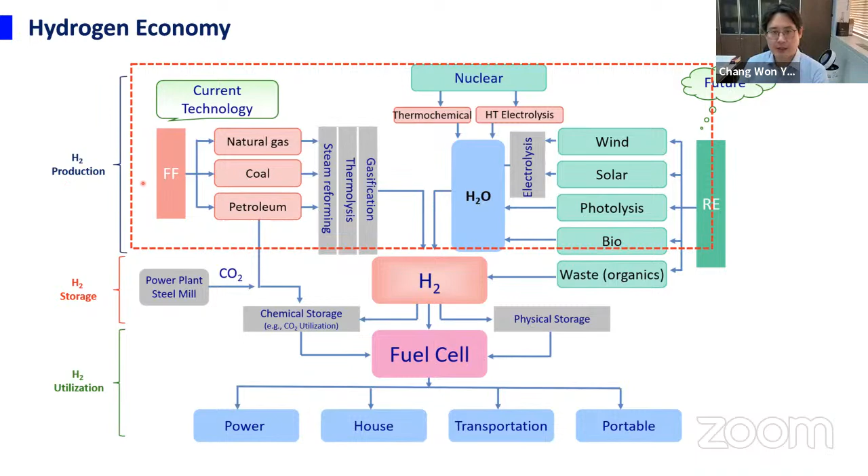So today, especially, I will introduce you to hydrogen production technology. The question is how we can produce hydrogen. I will introduce three parts: the first part is fossil fuel reforming, the second part is chemical dehydrogenation, and the third part is future technology and water electrolysis.

Let me first start with the current hydrogen production technology. There are some fossil fuel reforming processes here. The first process is steam reforming (SR), and partial oxidation, called POX. The third one is autothermal reforming of fossil fuel, and the fourth is dry reforming and others.

What are the advantages of this fossil fuel reforming process? First, it is economical. This is because previously many companies and industrial partners invested significant money to construct this kind of plant for hydrogen production utilizing fossil fuel. This is why it is economical right now—we can use the existing infrastructure.

But the disadvantages include that the fossil fuel reforming process releases significant quantities of CO2, so it is absolutely needed to capture the CO2 and sequestrate it somewhere. That's the problem.

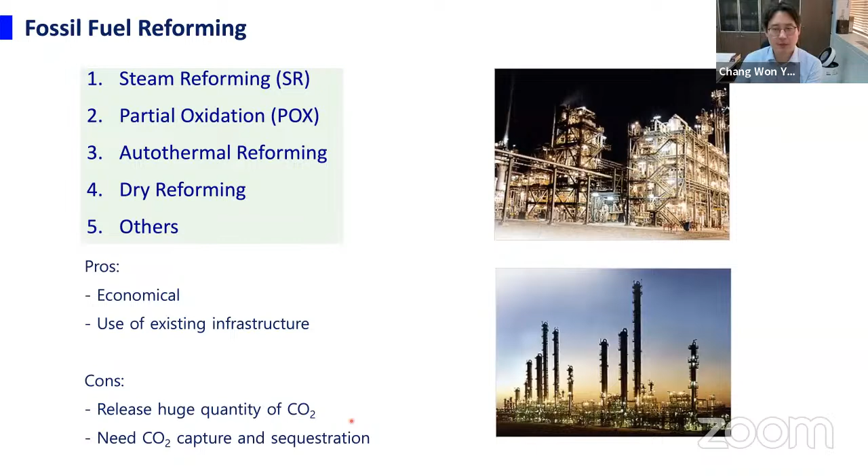Let me talk about fossil fuel hydrogen production technologies. This is the major hydrogen production technology nowadays, so we definitely need to know how it goes.

Let me start with the steam methane reforming process. You can use methane, the major constituent of natural gas. I'm not talking about steam reforming of fossil fuel in general, but steam reforming of methane specifically. This is called SMR.

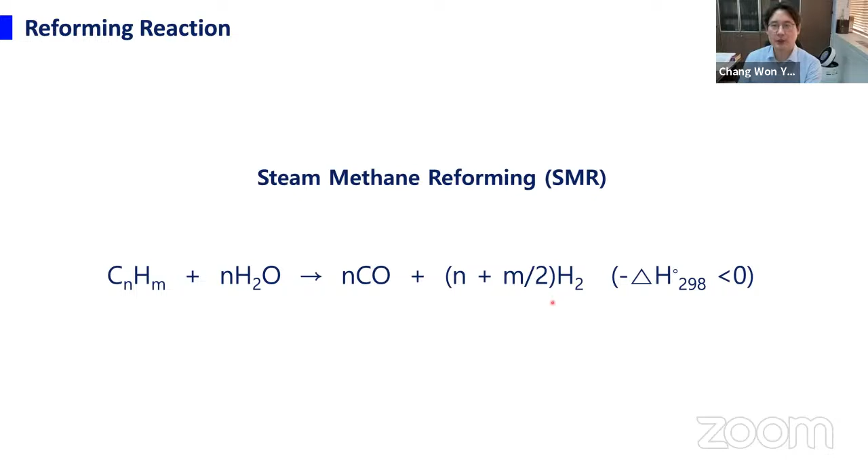Generally, if we use fossil fuel, the steam reforming process means we add steam, and in the presence of a catalyst, we crack the C-H and C-C bonds to produce CO and H2. That's the basic stoichiometric reaction of fossil fuel steam reforming.

Let me use methane for the steam reforming process. The methane reacts with steam to produce CO plus hydrogen. That reaction is endothermic, with a reaction enthalpy of 206 kilojoules per mole.

The product gas is a mixed gas of CO and hydrogen. This is called synthetic gas, syngas, and the hydrogen to CO ratio will be 3.

Now we're talking about hydrogen production technology. If we use this produced hydrogen in conjunction with, for example, the polymer electrolyte membrane fuel cell (PEMFC), we can't actually use this syngas directly to power the PEMFC, because the CO can poison the platinum catalyst in the fuel cell. So we definitely need to remove this CO.

So what we can do is a CO removal technology. One of them is called the water gas shift reaction, WGS. What it does is CO reacts with additional steam to shift to CO2 and H2 products. You can imagine the oxygen is transferred into CO to produce CO2.

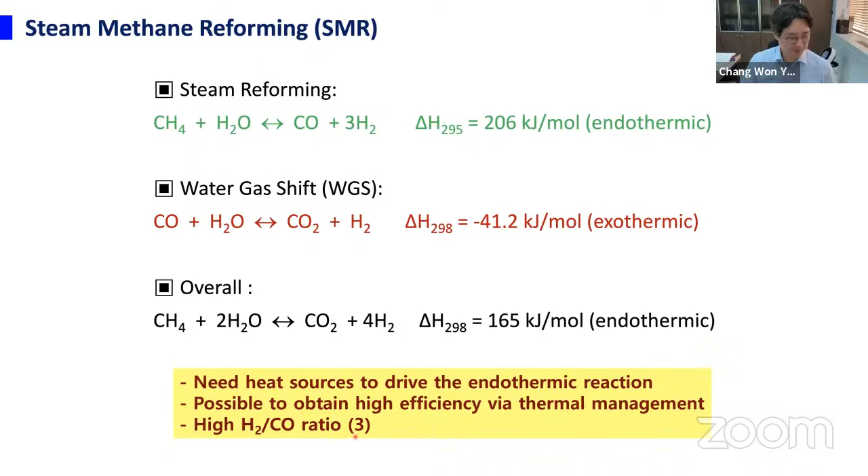That's the reactor for the steam methane reforming reaction. The steam reforming reactor shown here has catalysts equipped inside, with a radiation burner and heat transfer. If you look at the feed, it's about 25% methane with 75% steam, and it produces hydrogen, CO, CO2, unreacted methane, and some steam.

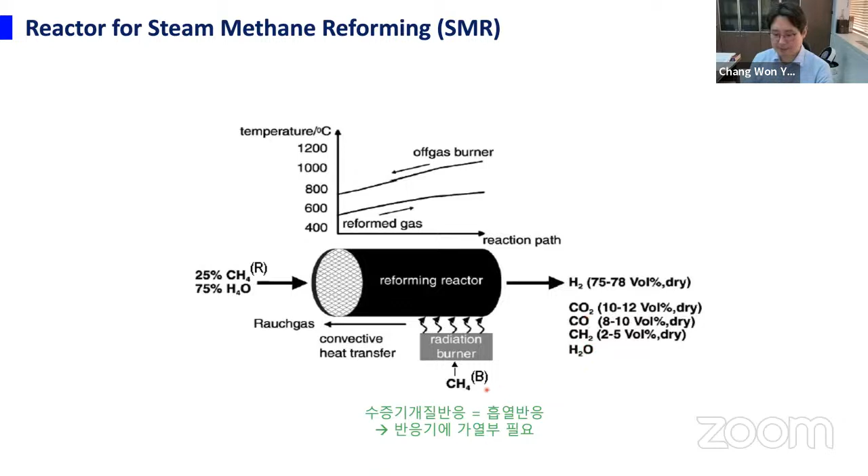I will skip this. So this is the real case, looking at the reactor for steam methane reforming, the SMR reaction. This is the cracking reactor, where natural gas and steam go in.

The reaction conditions shown here are about 20 to 30 atmospheres, a high pressure, pressurized reactor, and the temperature is about 800 to 900 degrees Celsius. It's a very high pressure and very high temperature reaction.

The reaction happens to produce a mixture of CO and H2. And I said we need to remove the CO, so here is the water gas shift reaction. The shift reactor means the water gas shift reaction, WGS reaction.

As you can see, there are two processes for WGS. The first is the high temperature water gas shift reaction, used to decrease the CO concentration to some lower level. Then we apply the second process, called the low temperature water gas shift reaction, to further decrease the CO level.

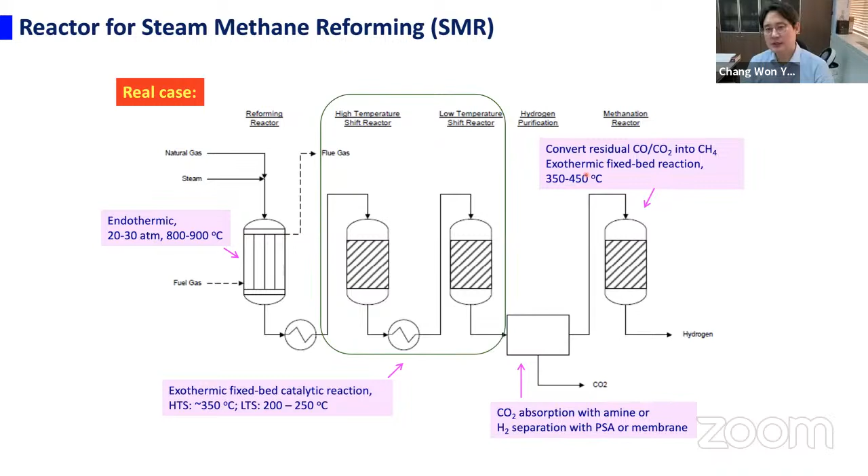The HTS means high temperature shift reaction, which occurs at 350 degrees Celsius, and the low temperature shift reactor occurs at 200 to 250 degrees Celsius. The rest will hopefully be H2, mostly H2 and CO2, with unreacted CO remaining. The CO2 will be removed by pressure swing adsorption technology or hydrogen separation membrane, and the remaining CO will be further removed by other technology. Ultimately, we can get high purity hydrogen.

The second hydrogen production technology using methane is POX. If you look at the complete oxidation of methane, 1 mole of methane reacts with 2 moles of oxygen to produce CO2 and steam water. That is an exothermic reaction - a very large exothermic heat will be produced, so we can use it. This is what an internal combustion engine does actually.

POX is partial oxidation. For complete oxidation, we need 2 moles of oxygen, but for POX, we only apply 0.5 moles of oxygen. Then we can produce syngas. The syngas ratio, the H2 and CO ratio, is 2:1. Then what we need to do is remove CO, using water gas shift reactions.

The total reaction enthalpy is exothermic, so in many cases we do not need heat sources - it's just burned. But the total heat in and out is low, so relatively low efficiency. But we can proceed with a very easy startup.

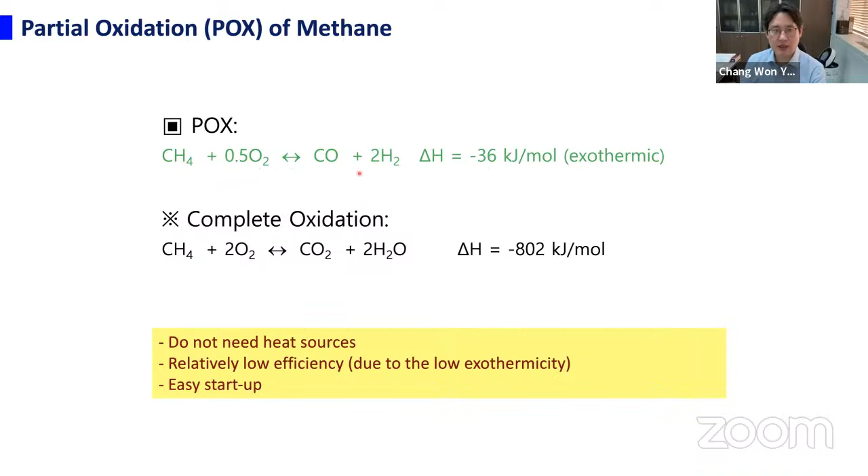The concept here is that initially, if you add all these mixtures, all this feed, what happens first is the POX will occur because it's easy - a very easy reaction, easy startup. It's an exothermic reaction, so it immediately reacts to produce syngas with heat. The concept is to initiate the POX, then the produced heat will be utilized for triggering the steam reforming process. So this process is relatively easy to start up and has high efficiency.

If you look at the autothermal reforming process, this is the reactor, and the feed consists of methane, oxygen, and steam. If you look at the temperature profile, first when this feed goes in, that's the reaction path. The initial process going on is the POX will occur, and the POX produces heat.

If you look at the temperature profile here, at the first path of the reforming reactor the temperature will rise up, up to about 1000 degrees Celsius. Then the next reaction will be the steam reforming process, which needs to absorb heat because it's an endothermic reaction. The produced heat will be absorbed by the steam reforming process, and at a certain point the temperature will stabilize and be maintained. This is why it's called the autothermal reforming process.

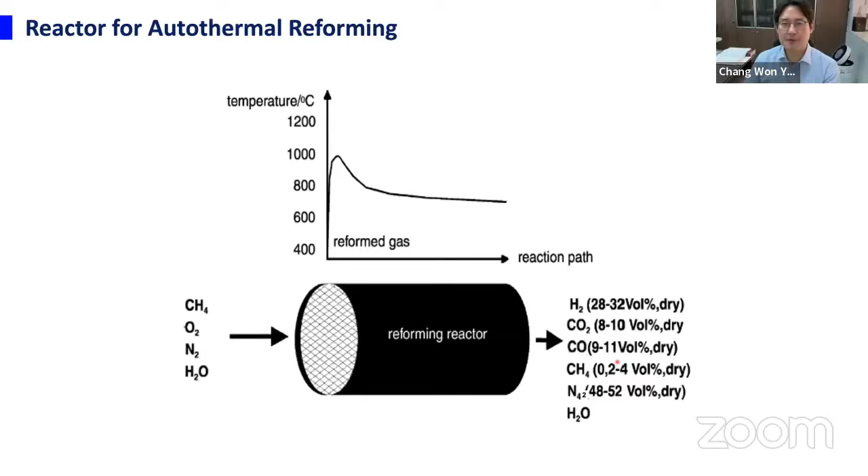The rest of the feed here, the off gas, includes hydrogen at about 30 volume percent, CO2 at 10 percent, CO, unreacted methane, and steam. After passing through this reactor, this mixed gas needs to be purified to obtain high purity hydrogen.

Looking at startup, steam reforming is slow - it's a big reactor, and the temperature is about 800 to 900, so it takes time to increase the reaction temperature. POX is fast, and autothermal reforming is in the middle. For reactor size, steam reforming is big, POX is small, and autothermal reforming is in between.

For hydrogen concentration after the reaction, the steam reforming process gives an H2 to CO ratio of 3, while POX is lower, about 2. The autothermal reforming gives a ratio of 2.5.

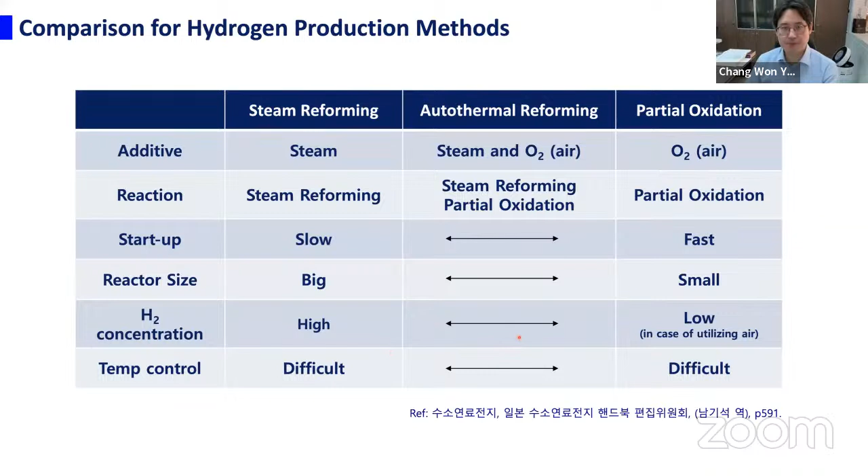If you add more oxygen, you move into the POX region, but the y-axis is 0 there, meaning no steam is added in that region. That's the POX region, with the added oxygen range between about 0.2 and 0.6. The ATR process is in between here.

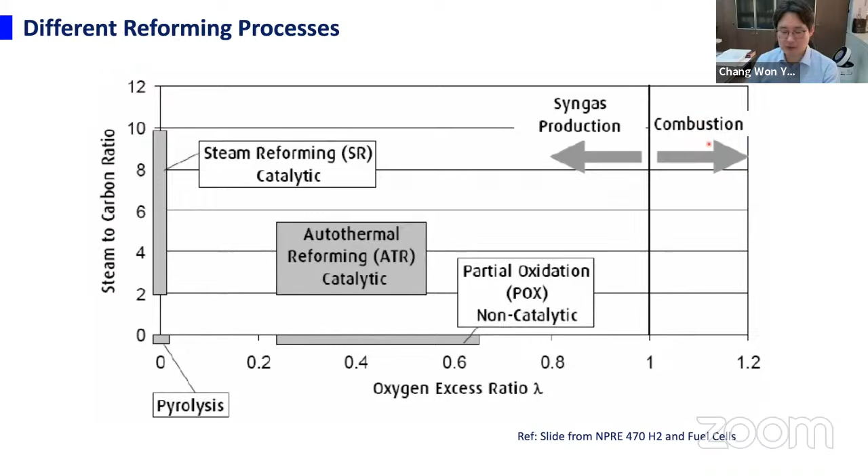If you add excess oxygen, the process no longer produces syngas—the reaction instead goes into the combustion range. This produced hydrogen is then supplied to fuel cells.

Let me briefly introduce some fuel cell technology. There are many types of fuel cells. The first is the PEMFC, which stands for polymer electrolyte membrane fuel cell. Another is the PAFC, which stands for phosphoric acid fuel cell. And the MCFC stands for molten carbonate fuel cell.

Looking at the PEMFC: all fuel cells consist of a membrane electrolyte in between and two electrodes—one is the anode, and another is the cathode. The fuel goes in, and in the PEMFC case, the fuel is H2. First, this H2 is decomposed into 2H+ plus 2 electrons.

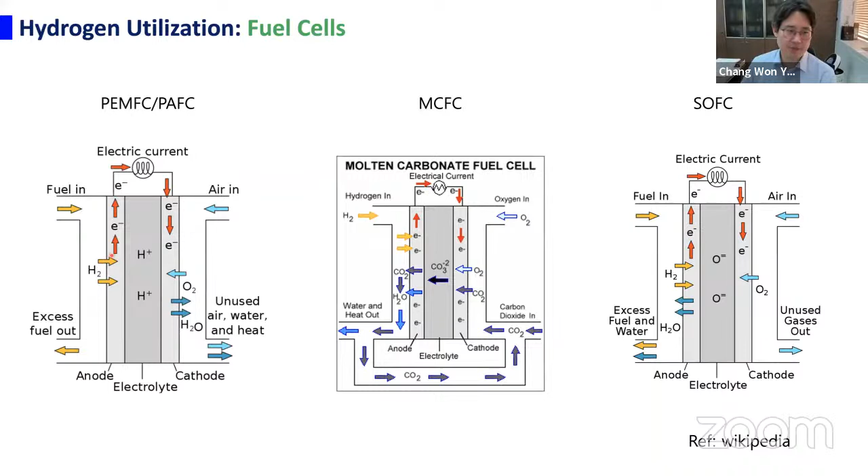Now let me talk about CO. CO can't really be an appropriate fuel for PEMFC because the electrode material there is platinum, located at the anode. If CO goes in, it strongly binds with the platinum and deactivates the whole process. So CO must be removed for PEMFC — this is CO as a poison, not fuel. Over 10 ppm poisons PEMFC. Nowadays we say less than 1 ppm of carbon monoxide must be supplied into PEMFC.

But interestingly, for these high temperature fuel cells — over 700 degrees Celsius for SOFC, 650 degrees Celsius for MCFC — CO is actually a fuel. This is different because the reaction temperatures are very high. Even though nickel catalyst is generally used for the electrode, and CO can also bind to nickel, because of this high reaction temperature the bound CO can be relatively easily taken off from the nickel site. So because of this, CO can be a fuel for these high temperature cells.

And how about sulfur? We talk about sulfur because natural gas contains a lot of it, so we need to know its effect on fuel cell operation. In the case of PEMFC, there are no significant studies on the effect of sulfur, so we don't know exactly. But in MCFC and SOFC, the high temperature fuel cells, sulfur cannot be used because again the electrode material is nickel. If sulfur is supplied into these high temperature fuel cells, it reacts with nickel to produce nickel sulfide species, deactivating the whole process.

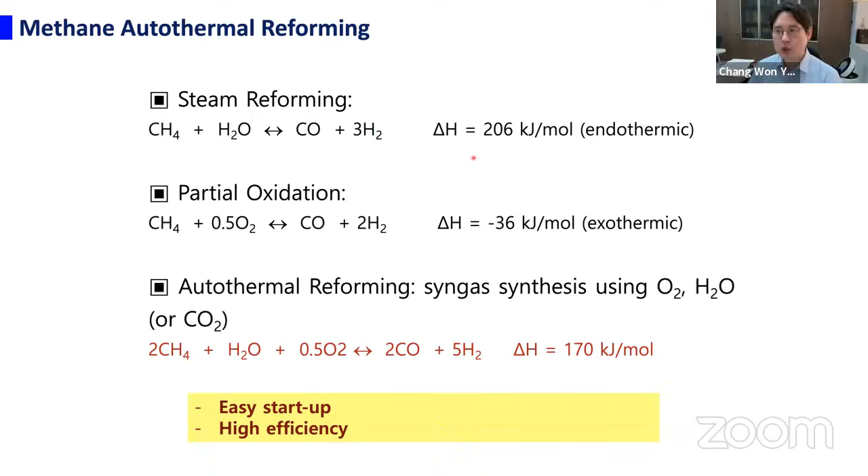Then you can imagine, for example, in the steam reforming process of methane, syngas is produced, and you can directly supply this mixed gas into high temperature fuel cells. There's no problem there because hydrogen is fuel and CO is fuel. But it cannot be supplied into PEMFC because CO can poison the PEMFC. So that's the difference.

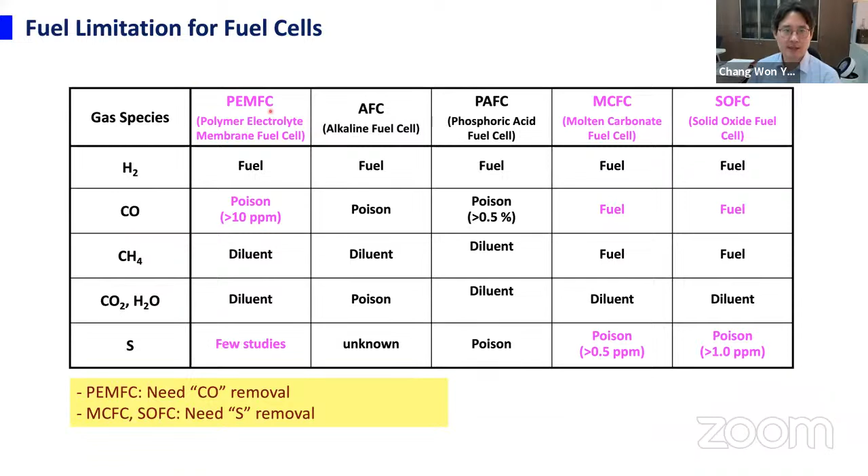So what is the technology for CO removal when utilizing PEMFC? The first one is the water gas shift reaction, which I already discussed. Another CO removal technology is PROX, preferential CO oxidation. There's also methanation reaction, and membrane separation, usually using a palladium membrane to purify hydrogen. And the other option is pressure swing adsorption, called PSA, a commercialized technology.

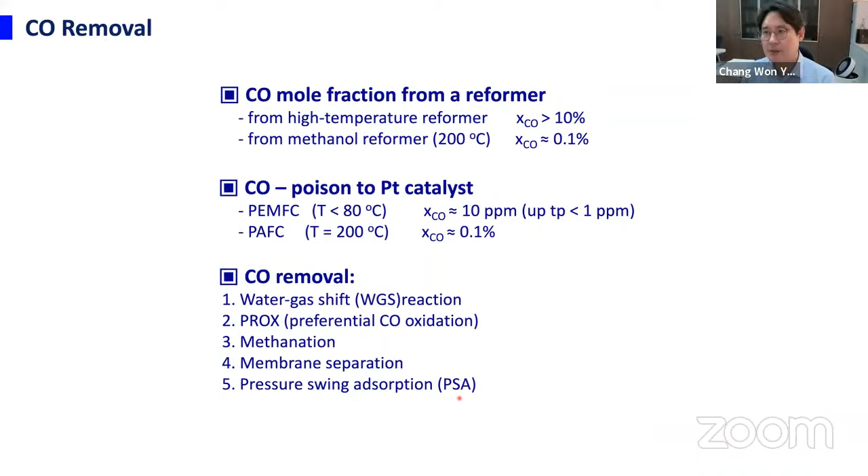What's the sulfur species removal technology? This is called hydrodesulfurization, HDS. For fossil fuel, we need to remove organic sulfur species to less than 0.1 ppm. The first step is hydrogenolysis, which means adding hydrogen, and lysis means cleave. So we add hydrogen to cleave.

In this process, the organic sulfur species, for example diethyl sulfide, reacts with hydrogen to produce ethane and H2S. The catalyst involved is nickel molybdenum oxide supported on alumina, generally called NiMo catalyst, or cobalt molybdenum oxide supported on alumina, called CoMo. The reaction temperature is 300 to 400 degrees Celsius.

The second step: the H2S produced further reacts with zinc oxide. Zinc likes sulfur more than oxygen, so an exchange reaction happens, producing H2O and zinc sulfide. That's how it actually works.

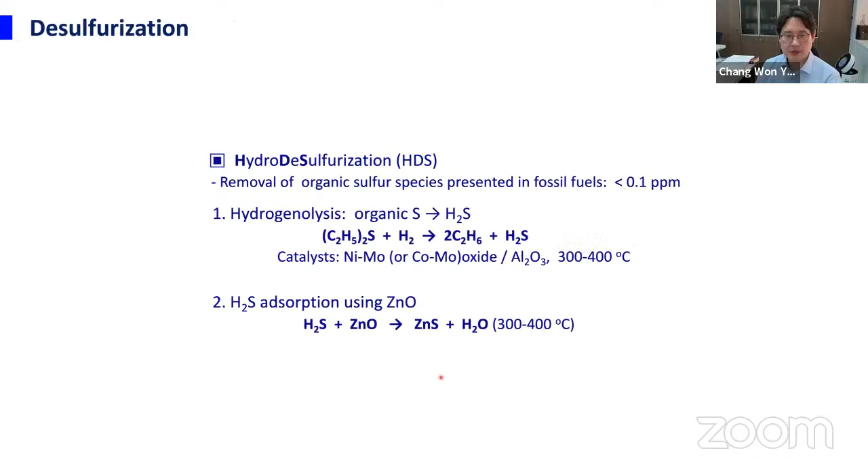If gasoline is the fuel for a PEM fuel cell, we add steam and air to proceed with autothermal reforming, which occurs at 800 degrees Celsius. Zinc oxide is used here because we want to remove sulfur species, so we proceed with ATR reactions and remove sulfur.

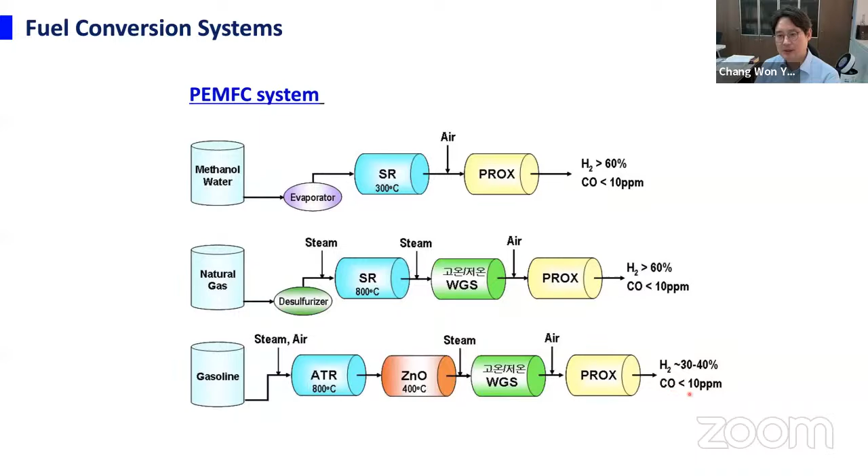The gases at this stage are a mixture of CO and H2. Then the WGS reaction occurs to further remove CO, finally reducing the CO level to less than 10 ppm to produce hydrogen. That's how it works, and this is the real system - I'm going to skip the details.

In the case of an SOFC system, solid oxide fuel cell system, the hydrogen processor will be much simplified. For example, fuel goes in, undergoes catalytic reforming or cracking, and the reformed gas is directly supplied to the solid oxide fuel cell to produce power. That's much simpler.

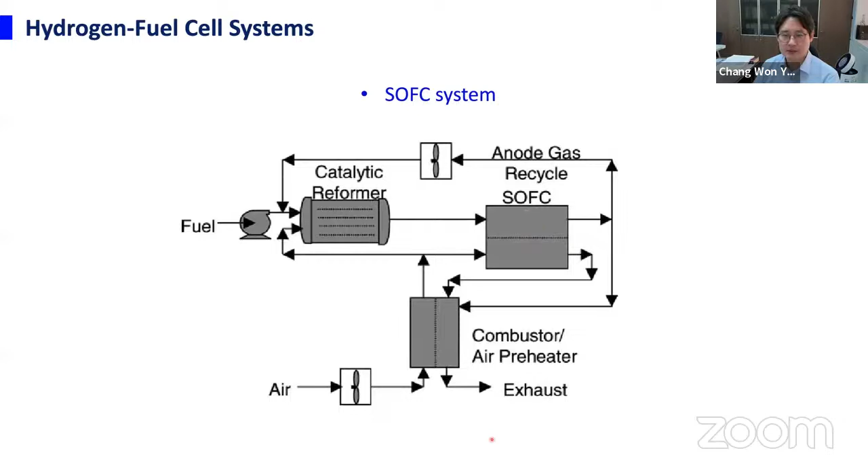Here's an example of a methanol reformer, actually applied for submarines. This is a proven technology from a German company, HDW submarines. They use methanol as a fuel to power PEMFC.

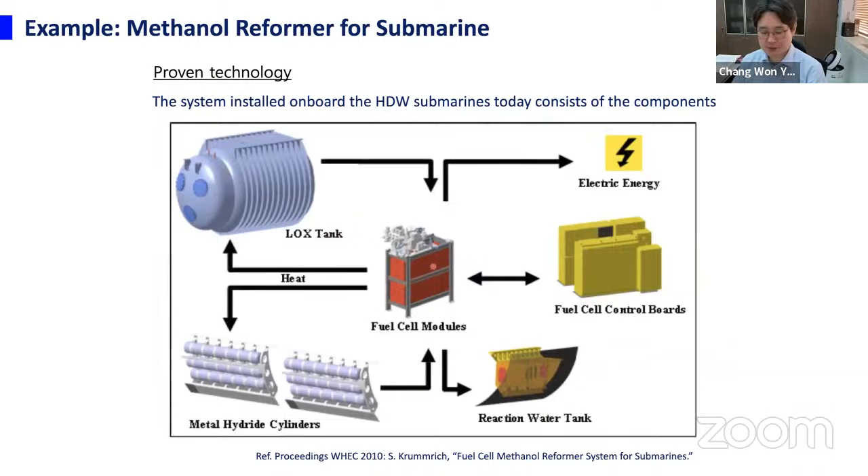Generally, the proven technology uses metal hydride as hydrogen storage. I'm not going to cover hydrogen storage today, but here's a metal hydride example: hydrogen is stored using metal hydride, and when we need hydrogen, we add heat to release it to supply the fuel cell for electricity. That's how it works currently, but now we are developing a methanol reformer system for submarines instead.

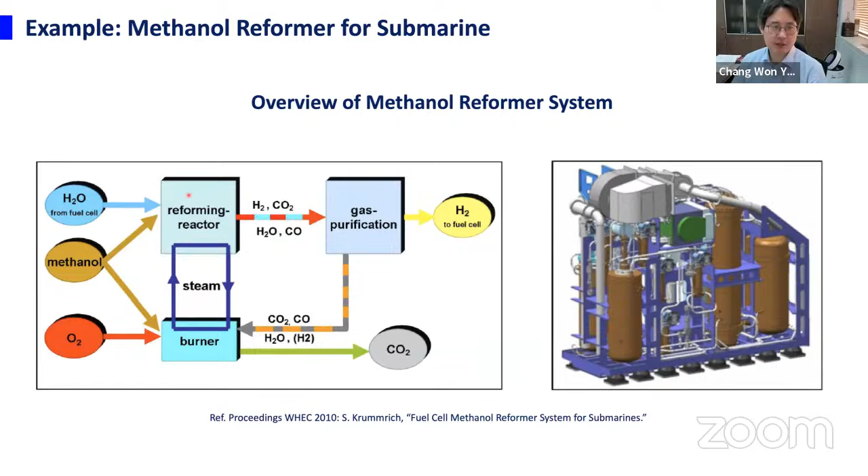This is the methanol reformer. In the reforming reaction, methanol and steam go in, and after reforming, gas purification via WGS or another reactor occurs. The produced hydrogen is supplied to the fuel cell, and the remaining gas provides fuel to supply sufficient heat for the reforming reactor.

The next process for hydrogen production is dry reforming of methane. I already talked about steam reforming, where steam is used as the oxidant. In dry reforming, we use CO2 instead to produce syngas - the methane reacts with CO2 rather than steam. Looking at the reaction energy, this process is even more endothermic compared to steam reforming.

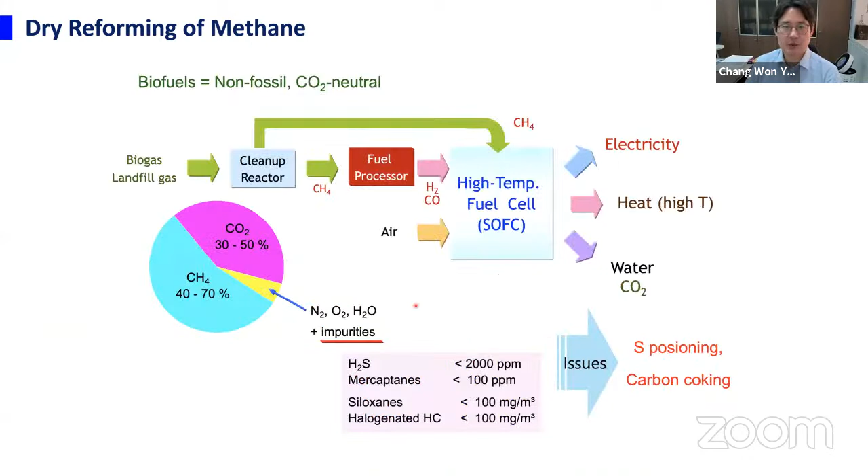And we can also use SMR or the dry reforming process, because the cooling effect will even be higher. So that's how it goes. I'm not going to talk about this in detail. That's how we can produce this, using these types of dry reforming processes.

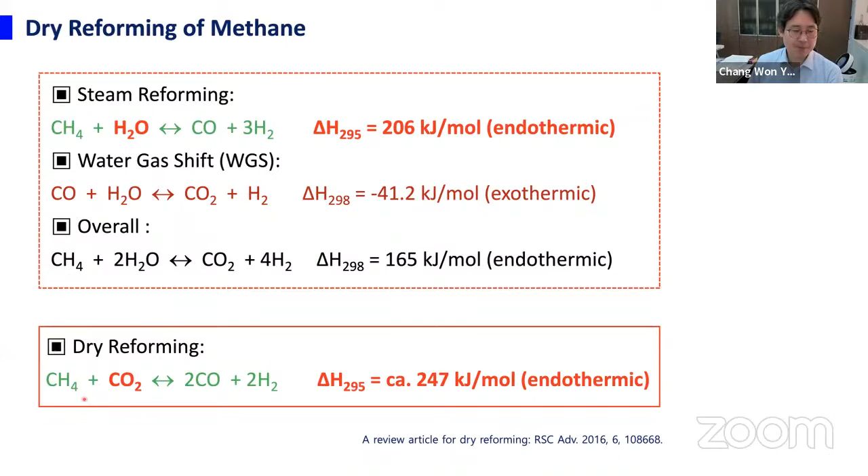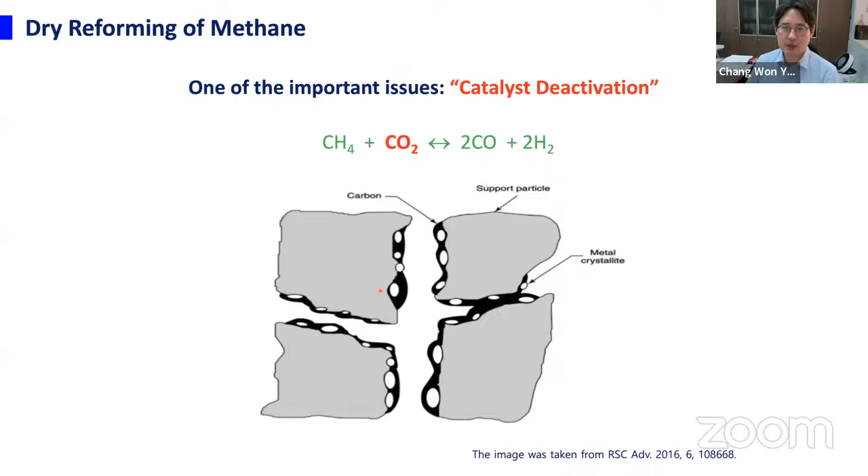But another issue still exists. One of the issues is, compared with steam reforming, in the case of dry reforming, the reactant contains more carbon. So one issue that can happen is catalyst deactivation, because as the dry reforming reaction goes on, these carbons, upon breaking the CH, CC, and CO bonds, deposit at the surface of the electrode catalyst and deactivate it. That's the problem.

Another problem is this deposited carbon produces a sort of carbon filament, because the nickel catalyst can make it—actually this is a catalyst for producing carbon nanotubes or things like that. So this kind of carbon filament is produced, and then that carbon filament will break down the nickel electrode. That's the problem, so rapid deactivation of the cell happens.

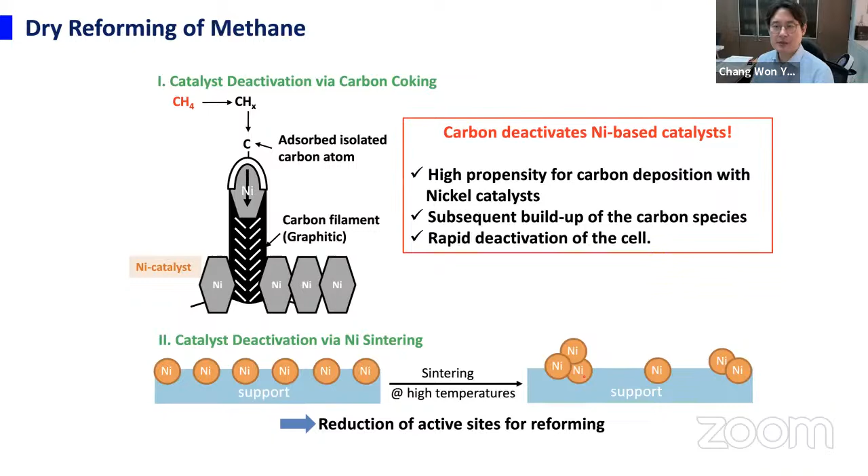And another problem is nickel sintering, which means nickel aggregation at high temperature. Initially, before the reaction, the nickel species is well dispersed on the support. But after the reaction proceeds at high temperatures, surface diffusion of the nickel happens, and nickel aggregates to form a deactivated species. So we need to develop relevant technologies to prevent this kind of catalyst deactivation.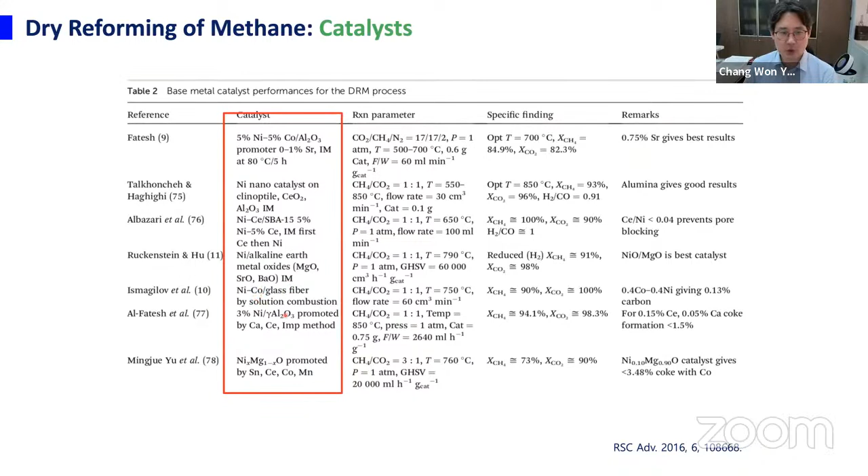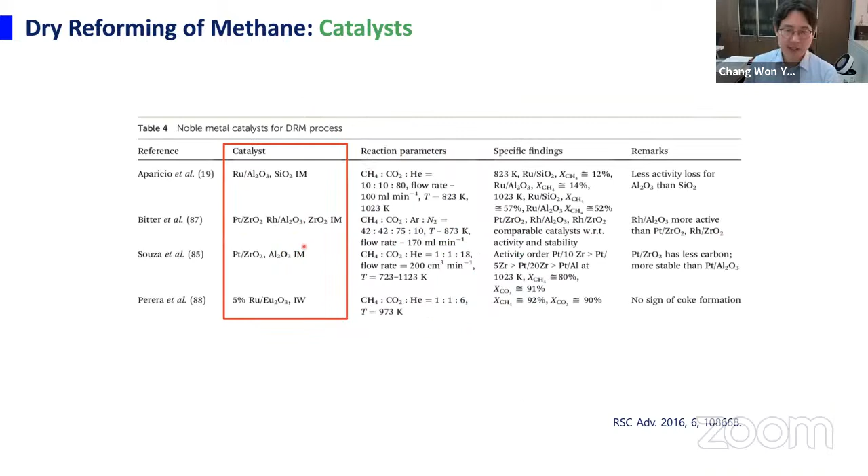So a lot of catalysts have been developed in this regard. Here is nickel with some cobalt as a co-catalyst supported on alumina, and also some ruthenium and platinum. So precious metal catalysts can also be used for these. I'm not going to use this one—let me just briefly say this dry reforming of methane catalyst development is very important.

Another important parameter to optimize the dry reforming of methane reaction is the operating condition. So we supply a mixture of methane, steam, and oxygen, and depending on the ratio of the added methane, water, and oxygen, some regions will derive carbon formation. So we can use the composition of methane, steam, and oxygen within a certain range, and the carbon-free region is good.

Generally, if you want to go from the carbon formation region to the carbon-free region, you can use more oxygen species—for example, more oxygen or more steam. Then you can prevent carbon formation because the formed carbon can react with O2 and steam to produce CO and CO2, removing it from the surface. But in this region, the problem is if you use more steam and more oxygen, especially more steam, you require more input energy. So that's not really the optimal region. Here is the optimal region, some sort of composition range. So this is why operating conditions are very important.

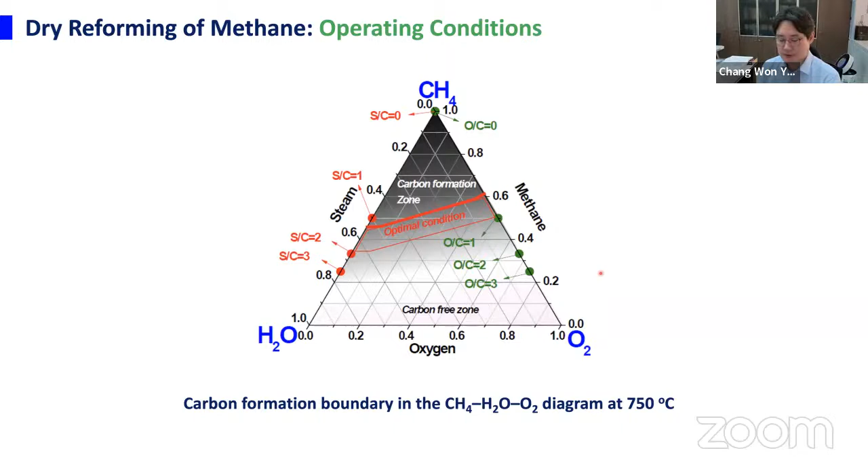Up to here, I discussed some other current technologies for hydrogen production, particularly based on fossil fuel. In summary, fossil fuel hydrogen production technologies are very useful to produce mass quantities of hydrogen, and the produced hydrogen can be used in conjunction with fuel cells and/or hydrogen turbines to produce electricity.

For fossil fuel, for example, the natural gas-based hydrogen production technologies I talked about: the steam methane reforming process, called SMR, then the POX, partial oxidation of methane, the third one is autothermal reforming of methane, and the fourth one is dry reforming of methane.

All these different technologies can produce hydrogen, especially first producing syngas. Syngas contains H2 and CO, but if we want to use these gases for fuel cells, especially pure ones, then we need to remove sulfur or the CO, carbon monoxide.

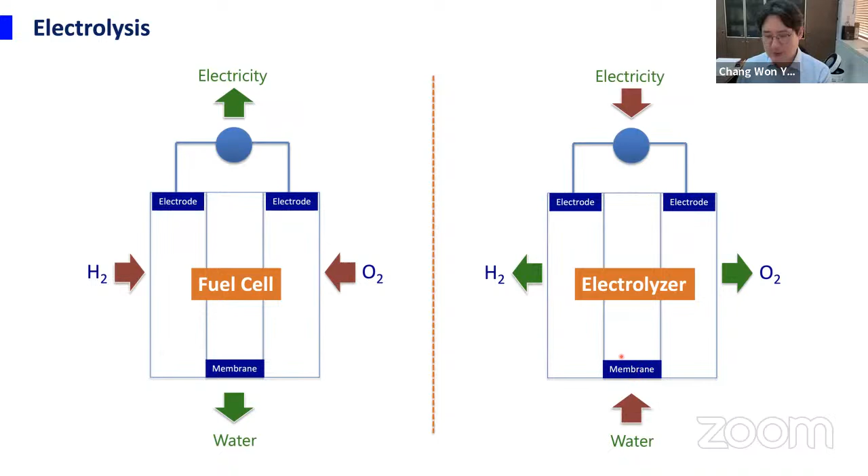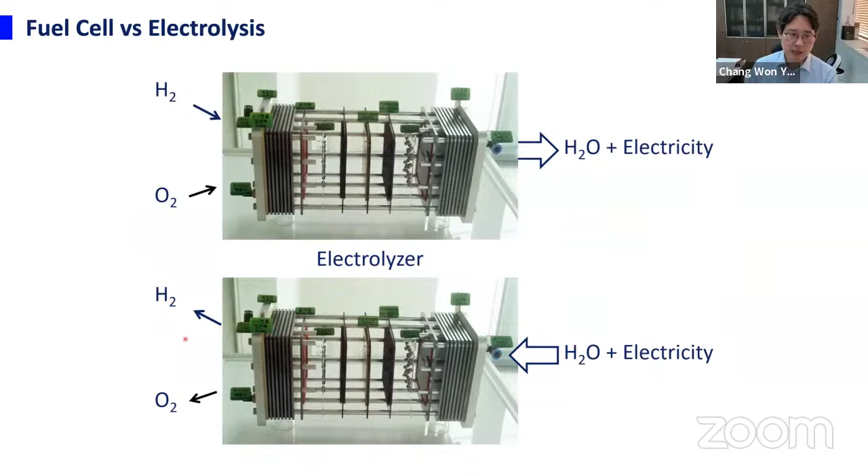Okay, so that's the fuel cell. That's the electrolyzer. Actually, the fuel cell and electrolyzer are the same, but here's the difference. This is the fuel cell: hydrogen goes in, oxygen goes in, an electrochemical reaction happens to produce water and electricity. The reverse reaction turns that into an electrolyzer, so we give electricity and provide water here, and one side produces hydrogen, the other side produces oxygen.

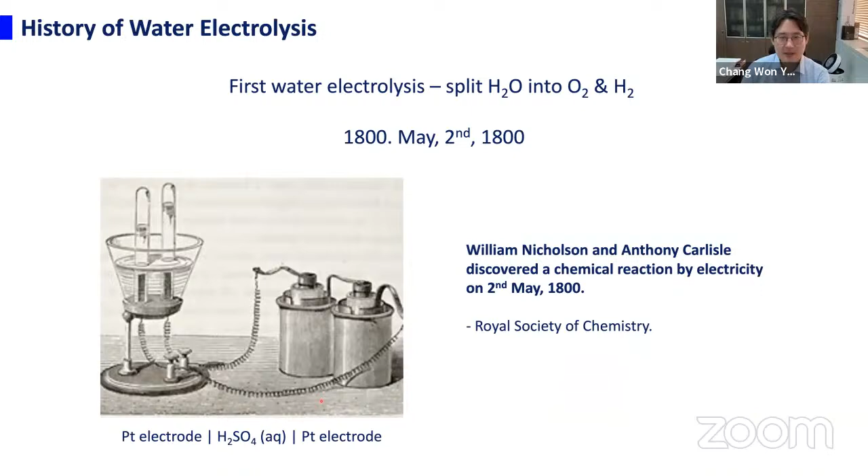So I'm going to skip that. Like fuel cells, there are a few types of electrolyzers. You can imagine if the separation membrane, the electrolyte, is a polymer, then we call this a PEM electrolyzer, polymer electrolyte membrane electrolyzer. If the separation membrane is solid oxide, then what is it called? You can imagine, right? Solid oxide electrolyzer. And if the electrolyte is alkaline, such as potassium hydroxide, then it's called alkaline electrolysis.

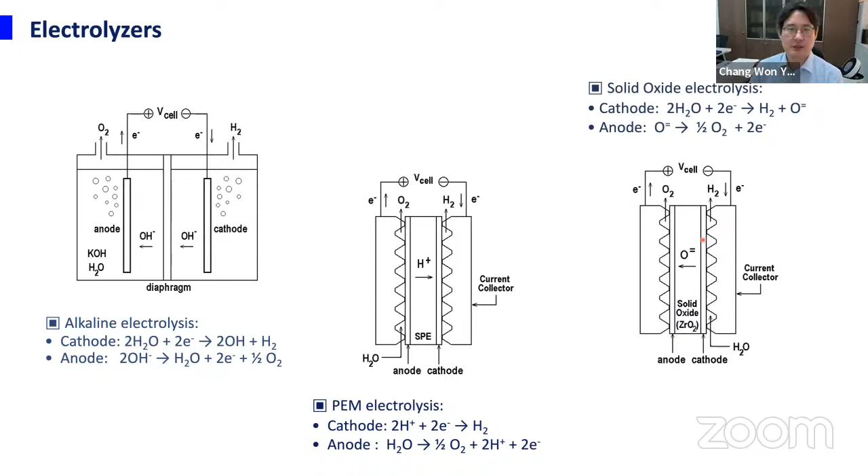A little bit more next-generation technology is the solid oxide electrolyzer. Generally people call it SOEC, solid oxide electrolysis cell. My lab is actually involved in the development of SOEC technology. So as you see, the electrolyzer gives electricity and water splits into hydrogen and oxygen. Why is the volume produced different? Because water splitting produces 2 moles of hydrogen: 2 moles of H2 and 1 mole of O2.

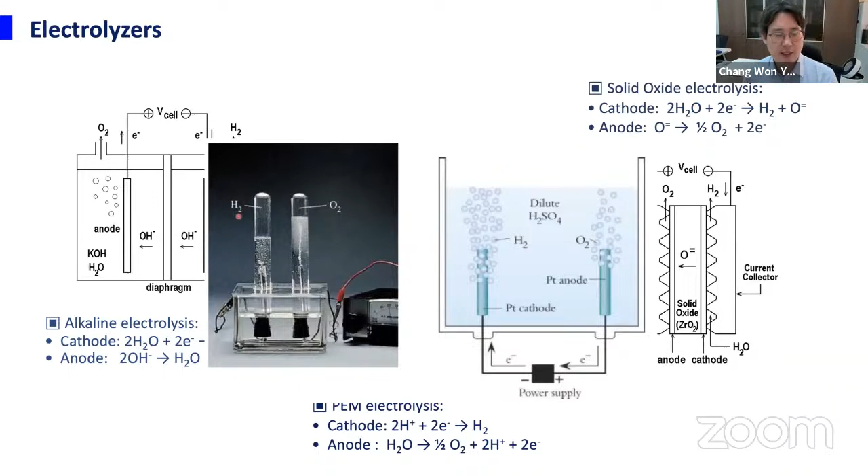Okay, yeah, so that's the comparison for different electrolyzers here. For operation temperature, alkaline electrolysis operates in the range of 40 to 90 degrees Celsius, and the ion transferred is OH minus. They generally use alkaline solutions such as potassium hydroxide, so OH minus transfer is involved here. PEM electrolysis operates in the range of 20, meaning room temperature, up to 100 degrees Celsius. The charge carrier here is H plus, right?

And solid oxide electrolysis, SOEC, it's like SOFC. The operating temperature is very high, over 700 degrees Celsius, and the ion transferred is O2 minus.

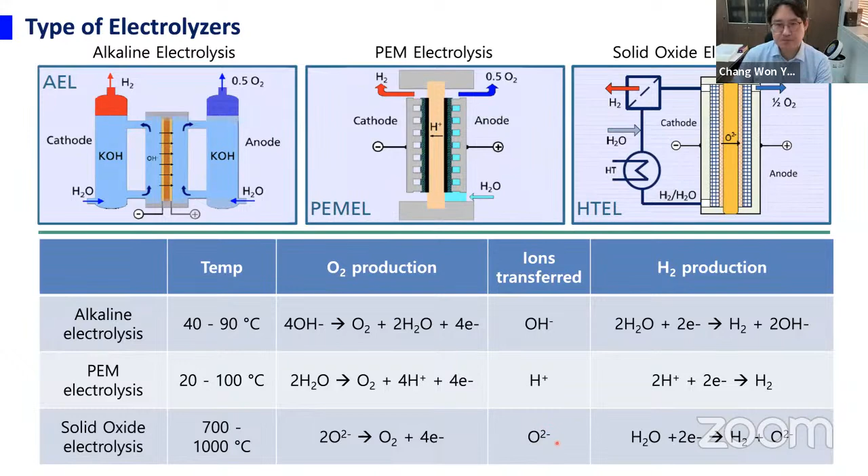You can see further additional comparison. For example, the electrode materials for alkaline reaction are iron, nickel, cobalt, all cheap, so there is no issue for catalyst cost. But in the case of the PEM electrolyzer, precious metals are used, especially iridium and platinum. That's one of the issues, especially iridium. Solid oxide electrolyzer uses nickel-containing ceramics, so there are no issues on catalyst cost.

And the temperature range I talked about, and the pressure: alkaline fuel cell is generally operated at less than 30 bar, and PEM can be operated up to 200 or 300 bar, and solid oxide electrolyzer operates near atmospheric pressure. The capacity will be up to 380 normal cubic meters per hour in this case. PEMFC is much smaller than that, and solid oxide electrolyzer is much smaller than that.

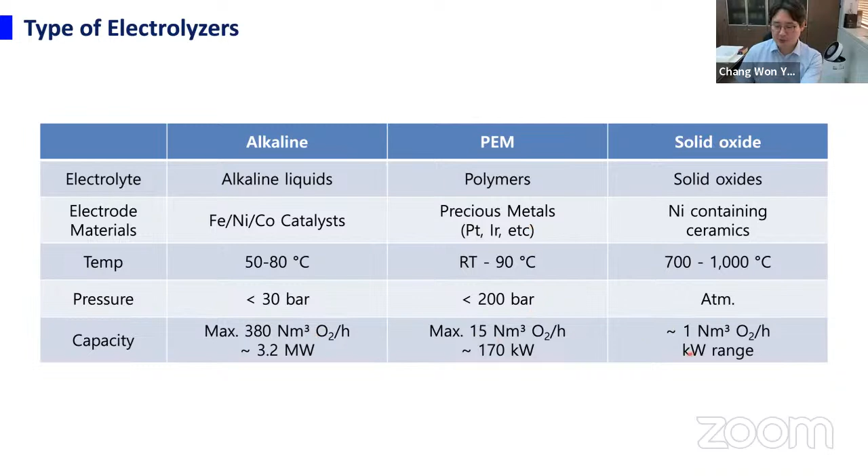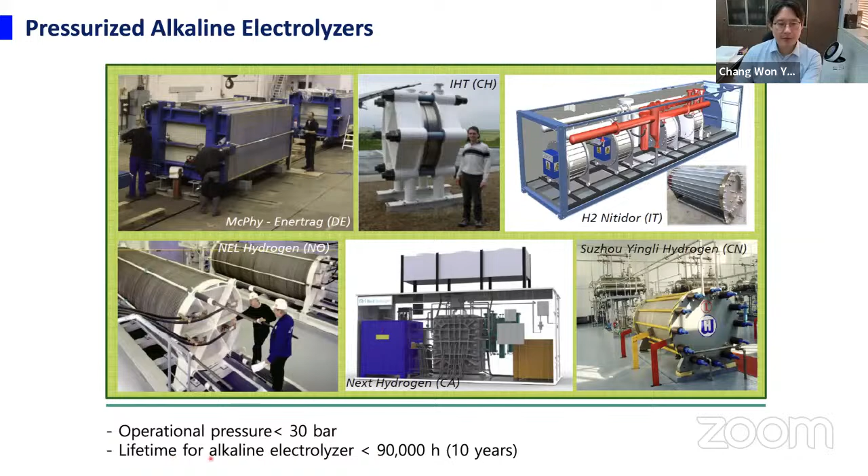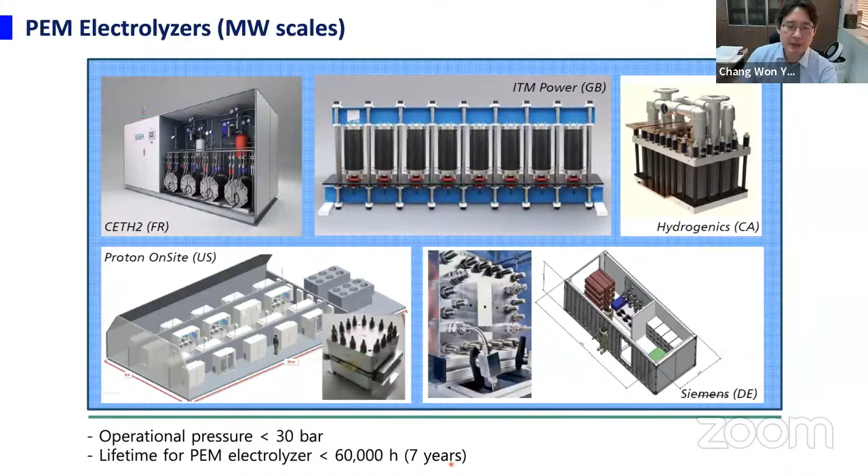Here, the lifetime for alkaline electrolyzer is near 10 years. And the PEM electrolyzer also, you can even buy - it's at megawatt scale - but there are still a lot of issues to commercialize, like iridium use and durability. Some companies claim the durability of the PEM electrolyzer can reach 7 years, but it still needs to be approved.

And this is also a PEM electrolyzer here. Each stack produces 15 normal cubic meters per hour. So it's 1, 2, 3, 4 stacks - this system produces 60 normal cubic meters per hour hydrogen production capacity.

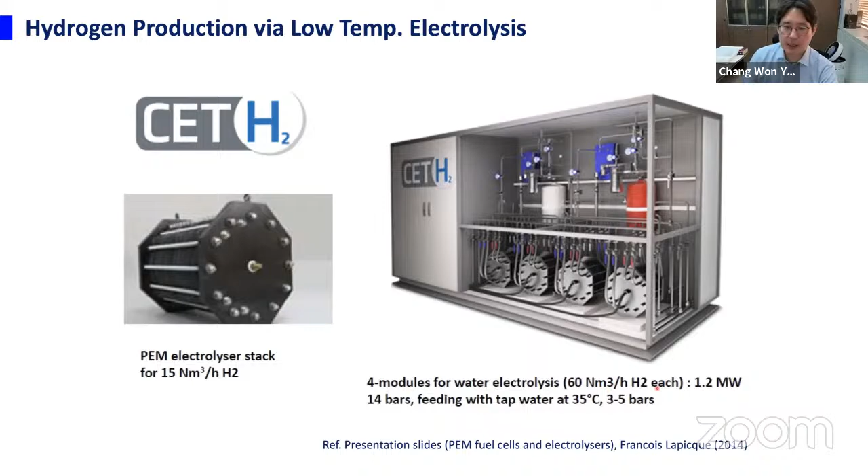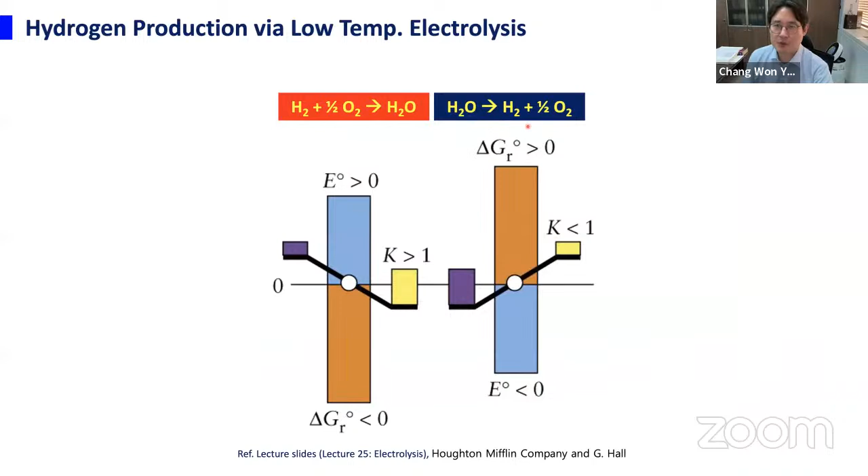That slide just shows you water splitting. Actually, the Gibbs free energy is positive, meaning it's not spontaneous. So that reaction requires really large energy. Definitely we need to use renewable energy to trigger this water splitting reaction. Otherwise, if we use electricity produced from fossil fuel, then what's the point of producing hydrogen from water? That's the thing.

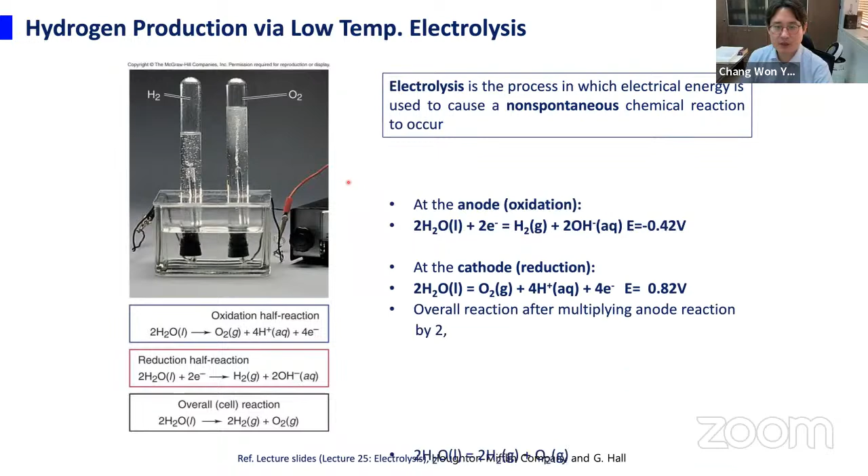I'm not going through the detail here, I think I can skip this. Okay, that's it for water electrolysis.

Let me go to the next hydrogen production technology: thermochemical cycles. The concept here is usually direct thermolysis. Thermolysis means adding heat - heat lysis breaks the bond. So direct thermolysis of water: if you just heat water to split it, the required temperature is generally 4,300 Kelvin, about 4,000 degrees Celsius. This is too high, right? It's too energy intensive.

The concept here is that by multi-step thermochemical processes, the temperature can be reduced to about 1,000 degrees Celsius, or 1,300 Kelvin. The concept is: we use MO as a mediator, which decomposes to produce M plus O2. Then M reacts with water and takes the oxygen to produce hydrogen. We can repeat this process.

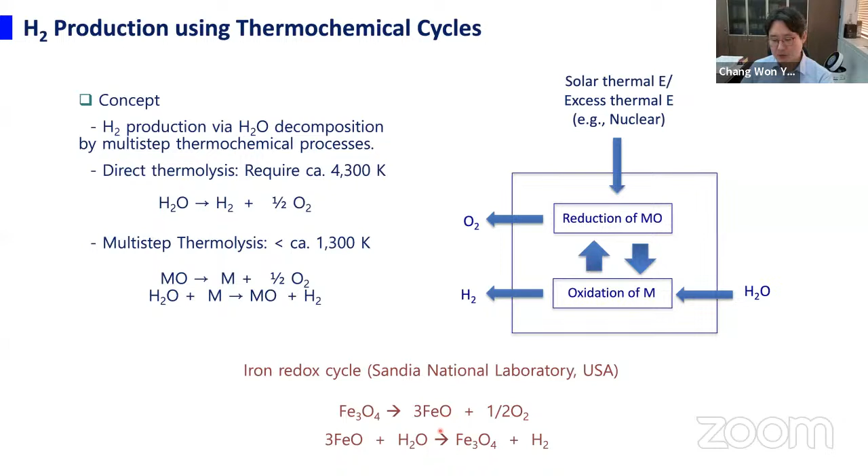One real example is the iron redox cycle, developed by Sandia National Laboratory in the United States. Here, M is FeO, with oxidation state 2. FeO iron oxide first reacts with water to produce hydrogen, and the oxidized form is Fe3O4 - the oxidation state is increased. Then Fe3O4 decomposes to produce oxygen and FeO back. We can repeat this cycle to produce hydrogen. This is the concept.

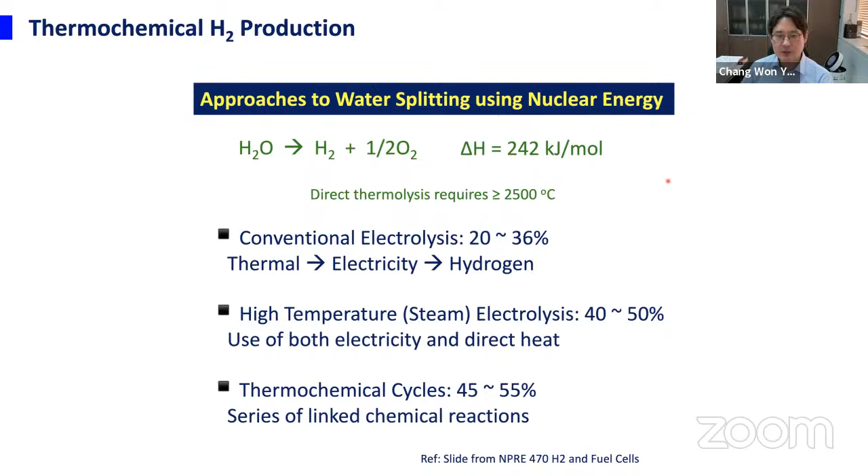This is a similar thing, so I can skip it - that's just water splitting based on thermochemical cycles in conjunction with nuclear power plant energy.

The next thing is photoelectrolysis, which means adding photons and electrons to split water. The concept: if we use semiconducting materials having a valence band and conduction band, there is a band gap - the gap between the valence band, which is filled with electrons, and the conduction band, which is unoccupied.

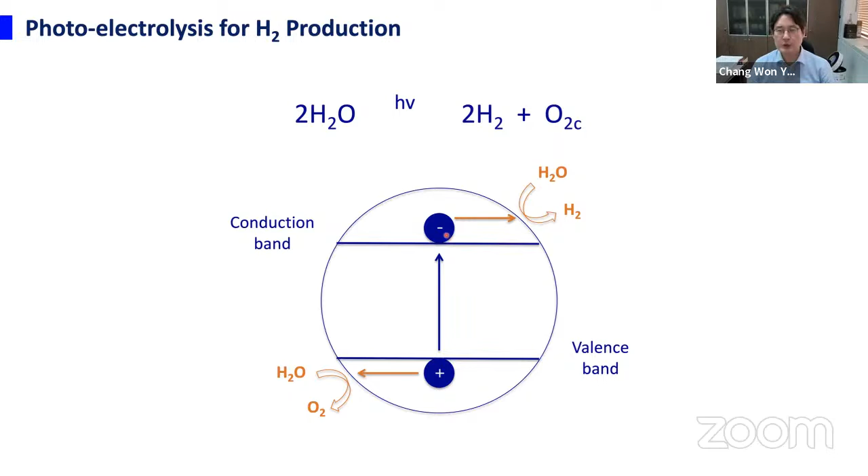What happens here is you can absorb a photon in resonance with this band gap energy. Then one electron can be excited into the conduction band. A negatively charged electron is generated in the conduction band, and a hole is generated in the valence band. We can use the hole for water oxidation to produce oxygen, and use the electrons for water reduction to produce hydrogen. That's the concept.

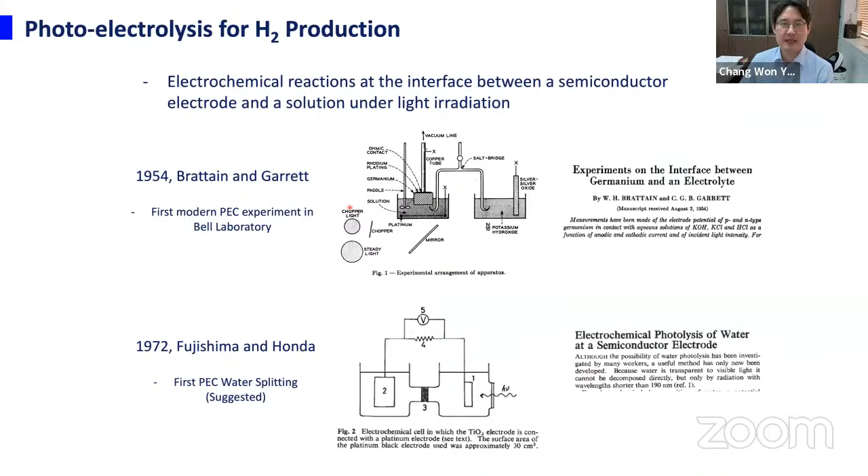This concept was developed quite a while ago, but it's not really commercialized yet. One issue is how we can use a broad range of sunlight for electron production - that's one thing people focus on, the materials for this purpose.

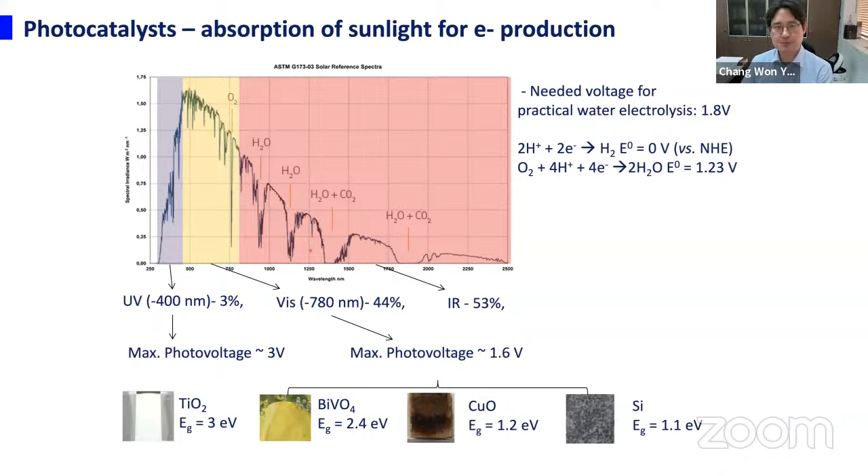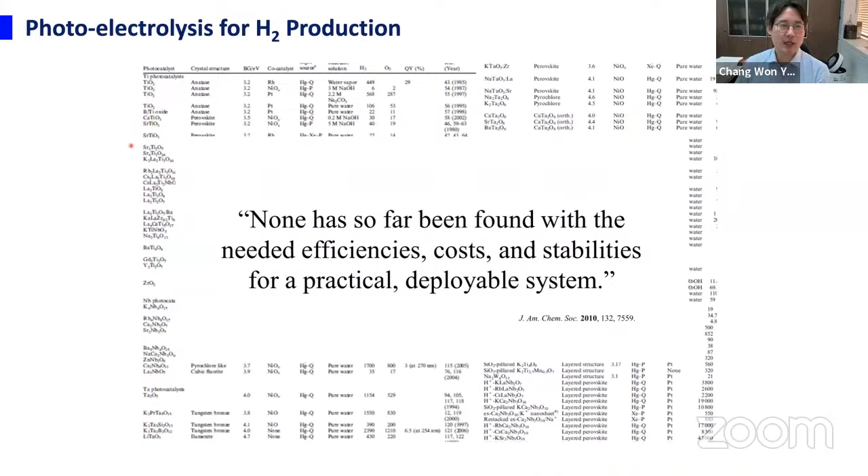So if you're interested in this area, you need to study the previous volume of literature and how I can design the relevant materials for this purpose. Okay, so I'm not going to go through it.

The last production technology is biological production. This biological hydrogen production includes direct biophotolysis, using biomaterials and photons to split water, and indirect biophotolysis, along with some fermentation technology. I'm not really talking about the detail here, just so you can see there are biological hydrogen production processes for hydrogen.

I think that's what I prepared for today. So the final summary: I talked about hydrogen production technologies based on fossil fuel in the first section. Then in the next section, very briefly, I introduced some other recent technologies for hydrogen production, especially water splitting. I hope this lecture helps you gain some relevant knowledge.